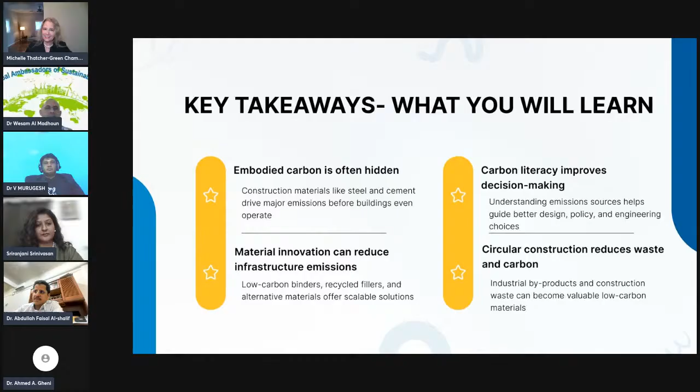We have carbon literacy and global impact as our topic, and these will be our key takeaways and what you will learn, as well as making sure that you end up with actions.

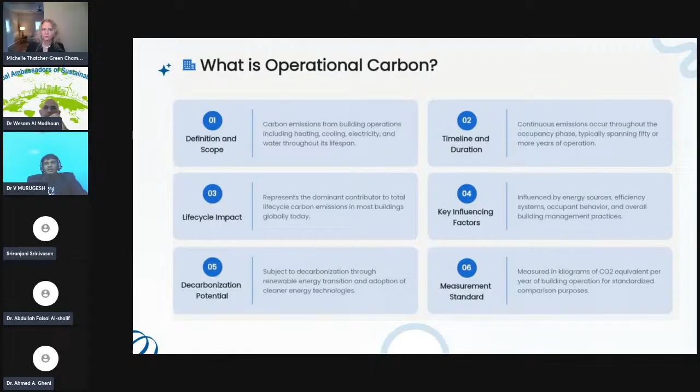So what is renewable energy? Instead of using electricity, we can go for solar panels. Then instead of steel construction, we can go for timber construction. These are some remedial measures we have to switch over to in order to reduce carbon emission. So there is the manufacturing carbon and there is the operational carbon. How is it different?

Embodied carbon is very much less when compared to operational carbon. Embodied carbon is only 20 to 30 percent, but operational carbon covers the lifetime of the building, which is nearly 40 to 50 years. This operational carbon footprint pollutes our environment through carbon emission. So we have to watch these two things very carefully and take necessary action.

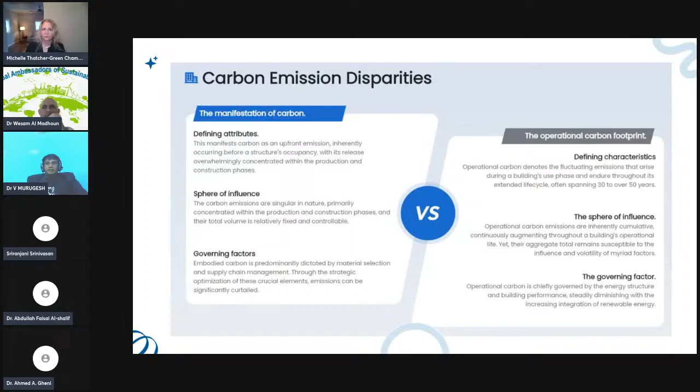Otherwise, carbon emission increases day by day, because we can't control our steel or cement production, which increases day by day. I will show how much it increases day by day and by how many tons. My section two is about the hidden carbon in steel and cement. I already said that it is unveiled, meaning I'm showing it to society for the first time. So how do steel and cement produce a large carbon footprint

in construction projects? First is the extraction of steel, which we get from iron ores, then calcination, then manufacturing, then transferring from one place to another, that is transportation. These things start from embodied carbon and end in operational carbon, that is the building we construct with steel and cement. This is the heavy cost of steel production and how carbon dioxide is emitted. See, day by day it is always increasing.

For embodied carbon in manufacturing steel, mining is 10%, smelting 70%, transport 15%, and others 5%. It emits 2.6 billion tons of CO2 annually. Both embodied and operational carbon combined create nearly 14 to 20% as per a US standard report. Normally it produces 20% of the greenhouse gas effect.

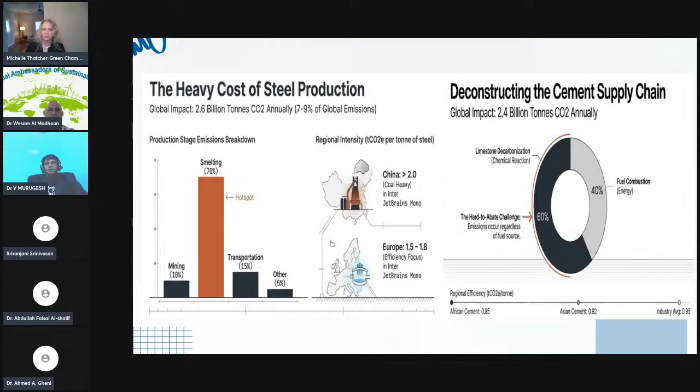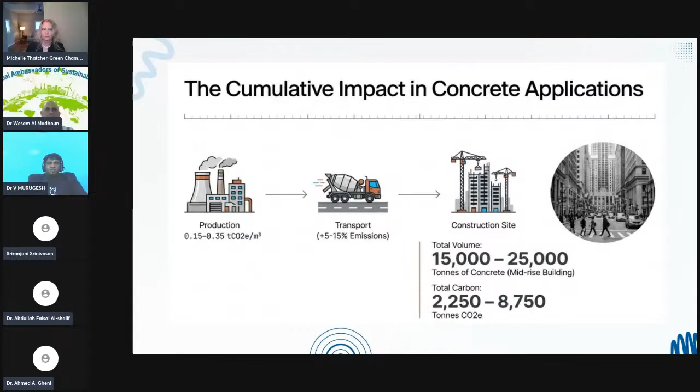To make it zero carbon, we have to use alternative materials. But traditionally, people are a little confused about whether to replace steel or cement, whether it will give high strength and durability or whether it will fail in strength or durability. People have no idea about using sustainable materials because they fear for strength and durability, which are the most important properties of concrete.

So here we are using hempcrete. It is a bio-based invention from a waste material, hemp fiber, mixed with a lime binder. Lime binder means calcium, because we know that cement is very rich in calcium oxide. Its chemical composition is 60 to 70% calcium oxide. So the main ingredient for the calcium is lime.

Okay, so lime binder plus water. While we are mixing, we are making it as an alternative material for carbon. So due to this, the carbon sequestration will make us carbon negative, because hemp fiber has a capability to break the carbon and it will absorb the carbon from the atmosphere. So while absorbing the carbon, automatically it will break the carbon into pieces and make it net zero. So this bio-based innovation plays a vital role in the forthcoming case.

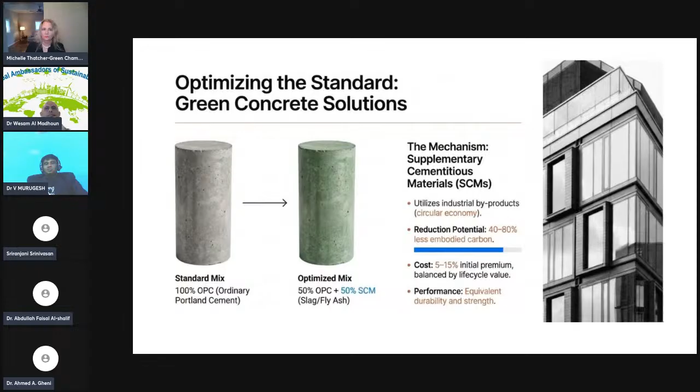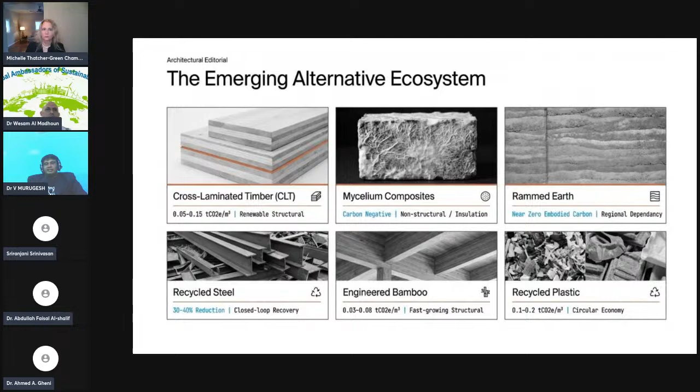Then we can use engineered bamboo, then recycled plastic. So these are the sustainable materials they are using at present to reduce the carbon percentage. So how will it be transferred? When I say, sir, I am going to use sustainable materials instead of steel and cement, then no one came to me. How is it possible? Some of them fear the building should have very good high strength, durability, or it may undergo failure in an earthquake. So I have to translate my strategy and implement this to the society.

How will I implement it? First of all, I have to audit. I have to say, see, this product should not affect the environment. Okay, some of them also agreed. Okay, you can go and audit. Then some of the persons have to analyze whether it has very good high strength, whether it is net zero carbon, and whether it has durability. So I have to prove that.

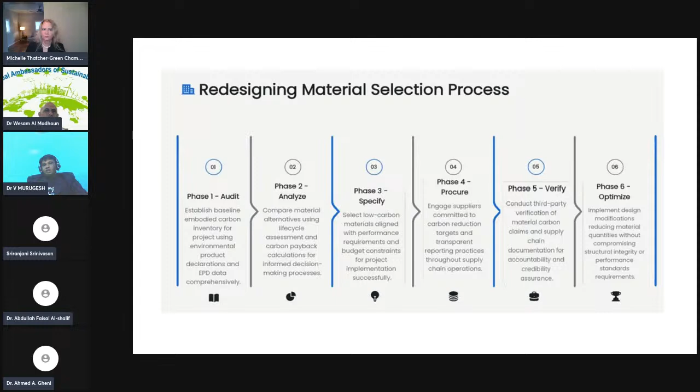So after this analysis, I go for the specification. I have to say that the percentage of carbon materials we are using here is a little bit decreased compared to the conventional one. That is, 5 to 15 percentage of amount will be reduced. So I have to specify. Then I have to procure from some suppliers, because these sustainable materials come from suppliers. Then the suppliers should verify, okay, this product is very good. So with this third party verification, I have to implement it to the concerned society.

So after this, I have to state the policy. See here, one cement bag price is nearly 500 rupees per bag, but my product is almost 300 rupees, and also it will be net zero, so there should be no carbon emission. I have to prove that. I have to give the price mechanism to the concerned market.

Then I have to go for the building code requirements, because when we are using this carbon steel, we go for IS code 456 for designing in India. So for the sustainable materials, we have to produce some guidelines on how to use them instead of steel and cement. Then I go for supply chain transparency. While testing, if anyone comes to see the strength, I have to show that. My product gives 5% more strength than the traditional one. So that chain transparency should be there for the implementation of any sustainable products, because we are going for alternative materials.

Okay, then certificate integration. So for any sustainable materials, we have to go for LEED, BREEAM, and WELL certification, because when we give a certification of LEED, automatically all the consumers will believe our product is the best one, because it is a certified one for the sustainable materials. Then financing incentives. I already said it's a financing incentive when you are going for steel or cement. If the rate is 500, here our product is 300, means automatically if we have very good strength and we have the certificate, all the people will come and approach us.

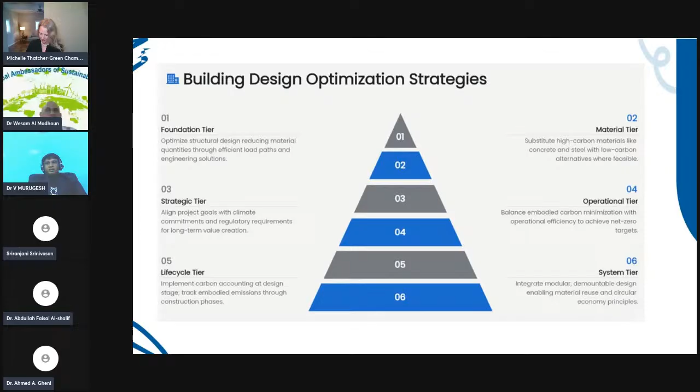Without corporate commitment, we can't be able to do this. So this is the building design. That is the foundation tier. Foundation tier is nothing but we have to reduce the load. Then we have to use the sustainable materials. Then, after using the sustainable materials, we have to reduce the carbon content. So this is the final one.

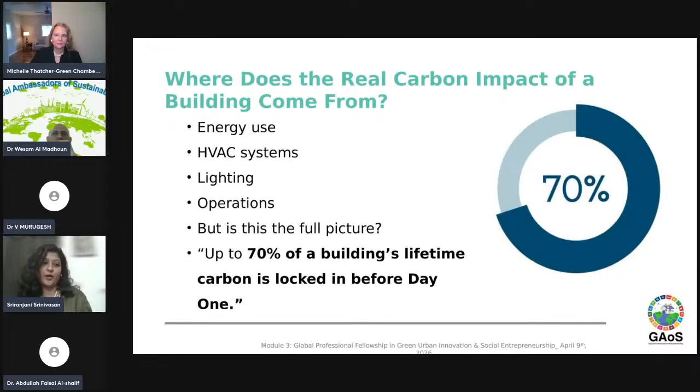So, how does this matter to any of us, right? This is not just a theoretical discussion. This has very real implications for anyone involved in a project. If you are a developer, this is something that could directly affect your ESG positioning, investor expectations, as well as your access to green financing.

And on the other end, if you are a consultant or a designer, then carbon is no longer an abstract concept. It becomes a design parameter, just like cost or performance itself. And if you're a contractor who's into procurement, then your material substitutions and decisions will suddenly carry a lot of carbon implications when we start talking about embodied emissions.

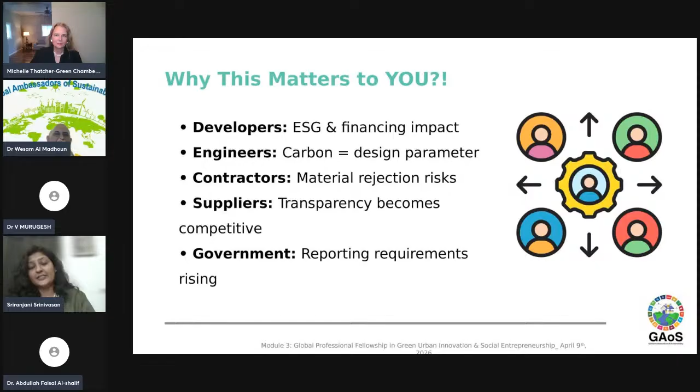At the other end of the spectrum, if you are a manufacturer, then your transparency with respect to product data becomes a major competitive advantage. So embodied emissions associated with materials are no longer a niche topic today. It's becoming mainstream.

Now, like I said, this has become even more critical today when we look at the scale of construction that's happening globally. We are building faster than ever before, and urbanization is accelerating. Infrastructure demand is growing, and with that, the demand for materials like cement, steel, aluminum, and glass is also increasing significantly.

Now, here's the challenge. Most of the emissions associated with these materials are not clearly visible to us. They are not something you can see on site; rather, they are embedded in the product itself long before it reaches the project gate. As you would have understood from the previous presentation by Dr. Murugesh, it's called embodied carbon because it's embedded into the entire process of the product, of the material itself.

So naturally, the next question is, where does this carbon come from? It comes from multiple stages. It starts with raw material extraction, as you saw in the previous presentation: mining, processing, and so on. Then comes the manufacturing process itself, which is often very energy intensive and sometimes involves chemical reactions that release emissions. And then there's transportation, the moving of materials across regions and countries.

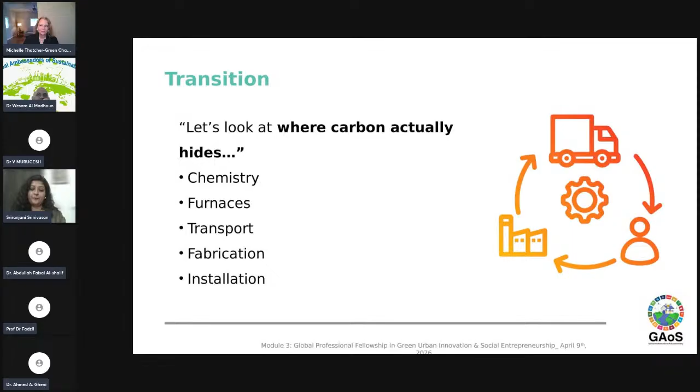Now, here's what makes this problem particularly challenging. From a traditional engineering perspective, we predominantly evaluate materials based on strength, durability, cost, and availability. But carbon does not always align with these parameters. Take two materials. They could look exactly the same, perform the same, even cost the same, but their carbon footprint can be completely different. And unless we specifically measure it, we would never know the difference.

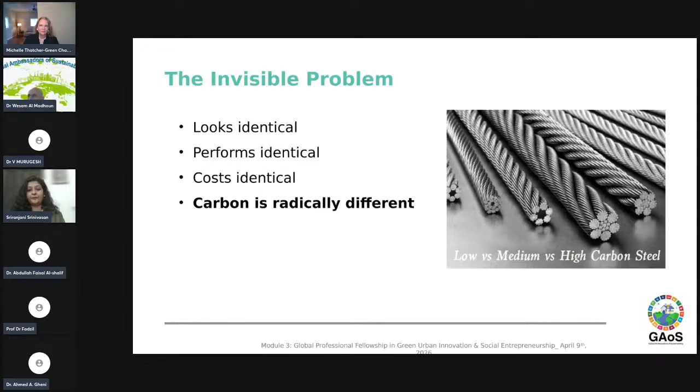Let me explain this with a real example. In one project, a particular type of steel was selected. From a technical standpoint, everything was perfectly fine. It met all structural requirements, complied with the specifications, and there were no issues in terms of performance. But when we evaluated it from a carbon perspective, it did not meet the project's carbon targets. And why was this? Purely because of the manufacturing process itself.

The steel was produced using a blast furnace, which, as most of you might know, is highly carbon intensive, and it relied a lot on iron ore and coal. If the same steel had been sourced from an electric arc furnace, primarily using recycled steel and electricity, the emissions would have been significantly lower. So technically, both options were acceptable, but environmentally, they were very different. And that is exactly where the decision-making gap exists today when we talk about embodied emissions.

Now, if we break this down into life cycle stages, most of this embodied carbon falls under what we call the A1 to A5 stages. A1 being the raw material supply, and then there's transportation, manufacturing, and A5 is related to the transportation to the site and the construction itself.

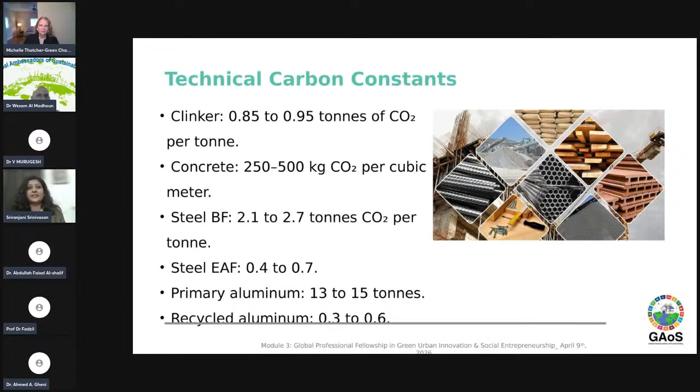So the important takeaway here is that we don't need to optimize everything at once. A large portion, almost 80 to 90% of embodied carbon in buildings comes from a few key materials, primarily your concrete, steel, aluminum, glass, and various facade systems as well. So if we focus our efforts on these materials, we can achieve substantial reductions.

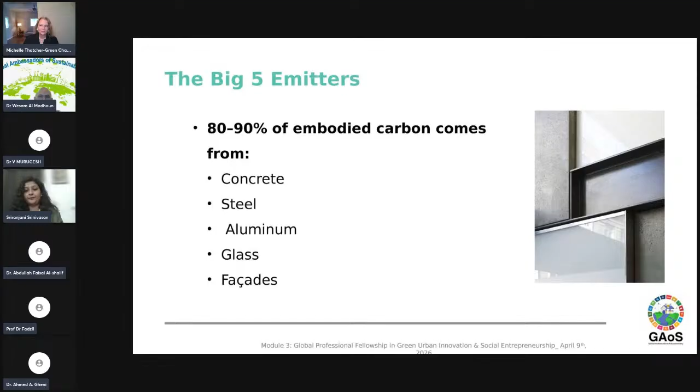When we talk about embodied carbon, cement is one of the biggest contributors, like we've discussed in the previous presentation. And it's important to understand why. It's not just because of the energy use. In fact, a large portion of emissions from cement actually comes from the chemical processes itself during the clinker production.

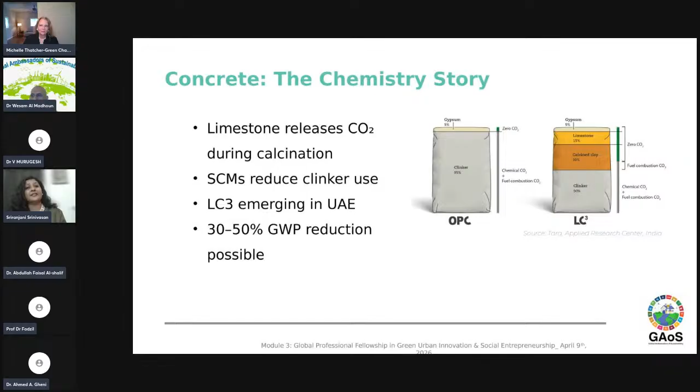I'm not going to be getting into much detail about it because I think a large part of it was already dealt with in the previous presentation. But it's important to understand the various aspects associated with the entire chemical process in the manufacturing of these products for us to understand the entire picture around the embodied emissions of these various materials.

Similarly, we've got, with respect to steel, now this again is another very carbon intensive product. So from a design perspective, it meets strength requirements, structural performances, and all of that.

But from a carbon perspective, there are two very different pathways, right? One is a blast furnace route that could be taken, highly carbon intensive, and the other is where you use an electric arc furnace and things like that. So decisions in the entire process of manufacturing of these materials will have an impact on their carbon footprint.

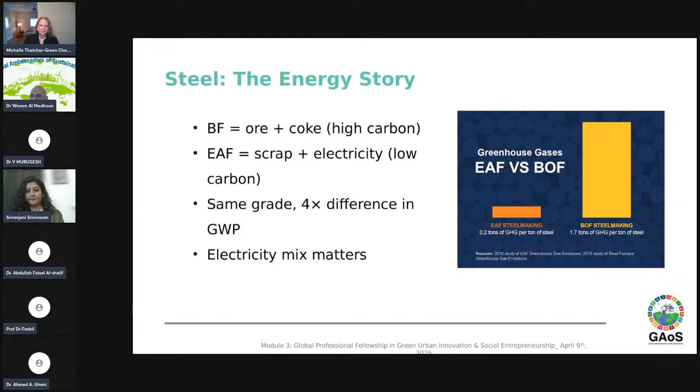Aluminum is an interesting material here because it has one of the highest embodied carbon values among the common building materials, but also it's one of the highest potential. It has the highest potential for reduction itself, right? So this is again something that could be looked at in terms of materials for your buildings.

So at this point, it's important to simplify the approach, because when we talk about embodied carbon, it can feel very overwhelming. There are so many building materials involved. But the reality is that we don't need to be optimizing everything. A small group of materials that contribute to the majority of the emissions is what we will have to be addressing and make the right decisions moving forward.

So now that we've understood where the emissions are coming from, the next step is about measurement, because without measurement, we are only making assumptions, and embodied carbon needs to be quantified. And today we have the tools that help us do that. We use life cycle assessment methodologies to calculate emissions across stages.

And increasingly, this is becoming integrated into the project workflows. So instead of guessing which option is better, we can actually compare material databases and shift the decision making from just opinions to actual evidence-backed decisions.

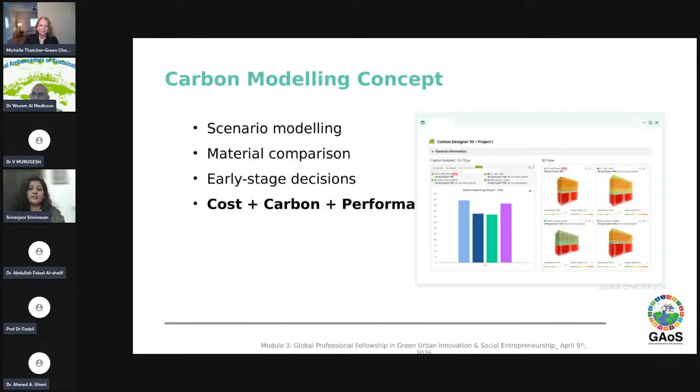This gets really powerful. You'll be able to model scenarios based on the materials at a very early stage in the design itself to help you make actual decisions where you can change materials, optimize quantities, and explore alternate materials as well. Based on that carbon modeling, you'll be able to make actual decisions.

So now that the design intent is already put into place, what's designed has to be translated into something that gets procured and ultimately constructed as well. That's going to be very critical. So how do we do that? We move from understanding the problem at the stage of design into the implementation. Let's look at how we do that in practice.

For example, let's start with concrete here. Instead of just specifying the strength, we could be going ahead and saying concrete should be emitting less than 300 kgs CO2 per cubic meter. At this point, the question would then be, should this be M30 or M40 concrete? But it's also important for us to understand what would be the carbon impact of that mix accordingly.

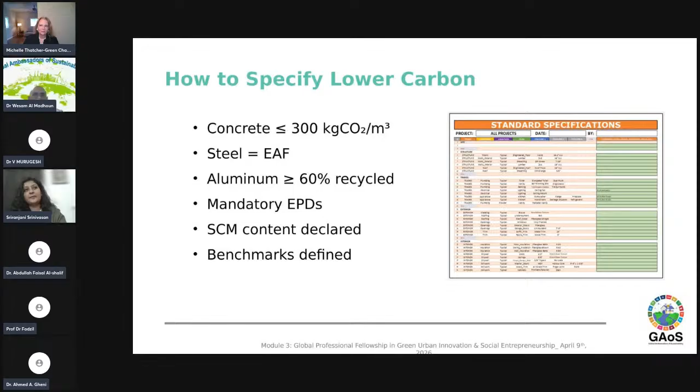Based on similar questions, it's important to float your tender documents, where you have EPD backed BOQs that play a very key role in the actual decision making process. You should be able to make decisions based on transportation distances, based on which you will also be able to understand the entire embodied emissions of the particular product.

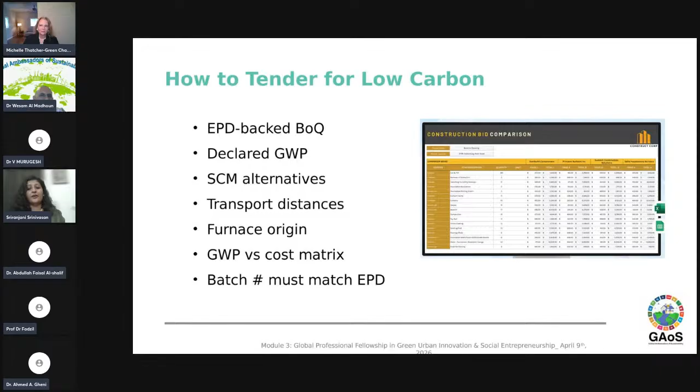So once you've specified and tendered for low carbon materials, all of this gets locked into your contracts and helps make the right decisions in terms of your supply chain and vendors from whom you're going to be able to purchase effective and efficient materials for your construction.

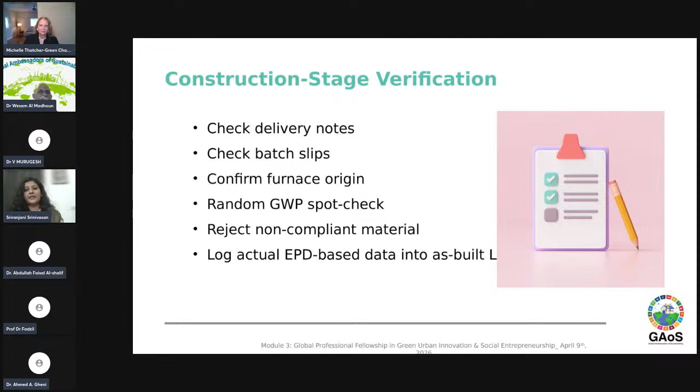So various things that you can check at the construction stage as well. Once you've floated your tender documents and purchased the associated materials, you have random global warming potential spot checks that can be done, and you can log the actual EPD-based data of the products being delivered to the site. All of this will play a very key role in the verification process during the construction phase.

Stepping back a little from the project level, this is what it looks like on a global perspective. The world is changing today. Across nations, we have various aspects of carbon coming into the picture, especially with respect to embodied emissions. So some real example numbers showcase how the world is seeing a reduction from the lens of carbon.

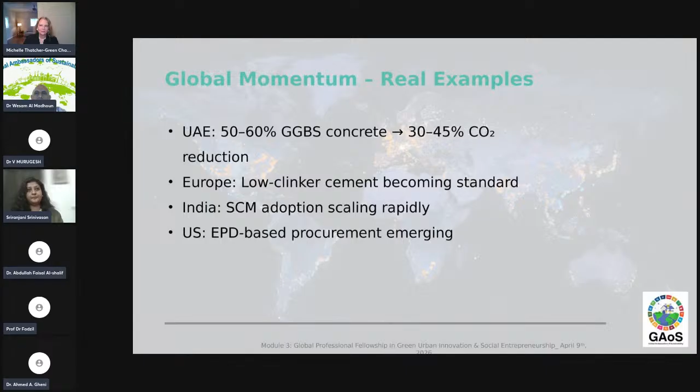That's where it's going to be very critical, and I'm just bringing in what we do at my organization. Right from design into construction into operations, you would be required to quantify all of the emissions associated with each material, each process. Based on that, there's a verification or validation that happens with certification bodies like Global Network for Zero, which is what we do. Based on this entire structured approach around your project, you'll be able to make the right decisions associated with embodied emissions.

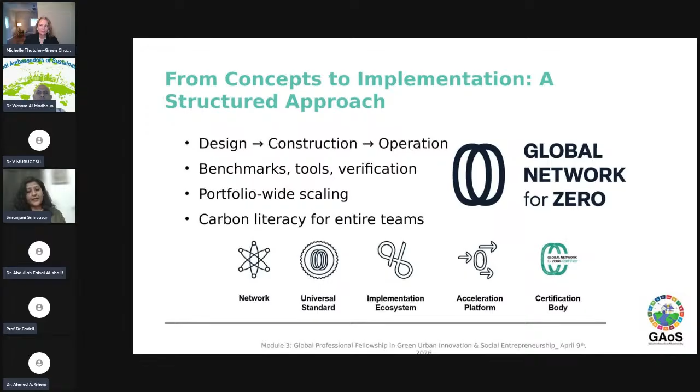So after everything I've said today, I want to leave you with one simple idea. Ask for the EPD before you ask for the price of the product, because the moment you do that, you can change the entire conversation. Today, most decisions are driven by cost first, and carbon becomes an afterthought. But when you ask for the EPD first, what you are basically saying is performance matters, impact matters, and transparency matters as well.

I'll leave you with that thought. And remember, every material that we choose builds the world our children are going to be living in. Thank you so much for the time today. I would be happy to take any questions at the end of the session.

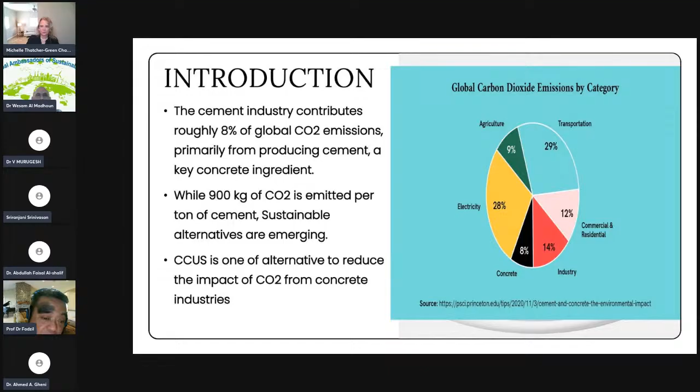Due to this issue, world organizations have come up with an idea to introduce a carbon CO2 tax. When they introduced the CO2 tax, all the industries producing CO2 got worried because they have to pay for the CO2 they produced. Due to that, as an initiative to reduce the impact of carbon tax on industries, they came out with another idea. They call it CCUS.

So what is CCUS all about? CCUS refers to what we call carbon capture, utilization and storage. The main reason for having CCUS instead of paying a high CO2 tax is that it also works toward SDG requirements, and nowadays people are talking about ESG. So CCUS becomes a greater point for the industry to get the ESG point and represent the initiative of SDG.

So C refers to capturing CO2 from industrial sources. U refers to utilization of CO2 in concrete production or curing. And S is the storing of CO2 permanently in the concrete matrix.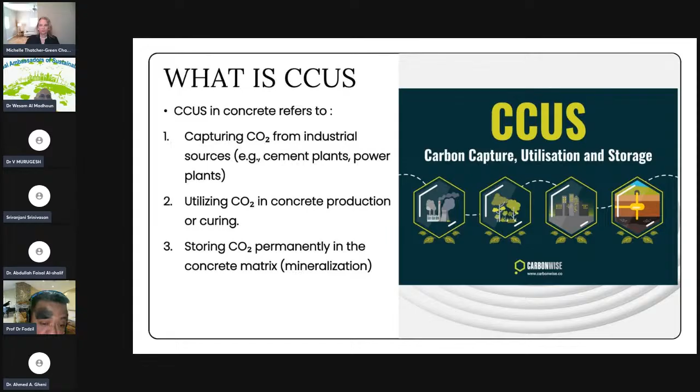Unfortunately, the calcium hydroxide stops the intersections of calcium silicate hydrate and creates micropores inside the concrete or cement matrix. This issue has become a big worry for engineers and scientists, who are looking forward to reducing the composition of calcium hydroxide in the cement matrix.

So the concept of introducing CO2 into the concrete is identified as one of the best methods to overcome the issue of calcium hydroxide. From the research carried out, it is identified that by introducing CO2 into the cement matrix, the CO2 has successfully transformed the calcium hydroxide into calcium carbonate.

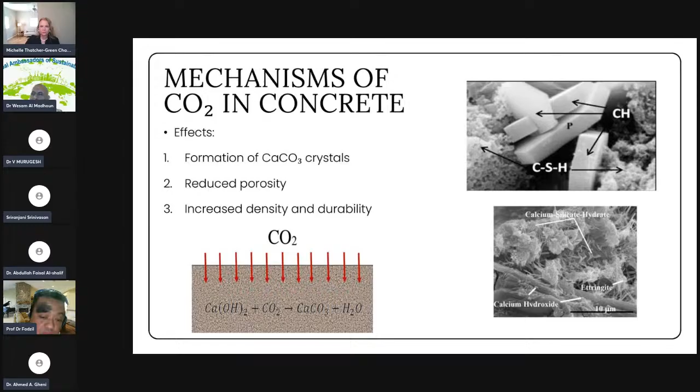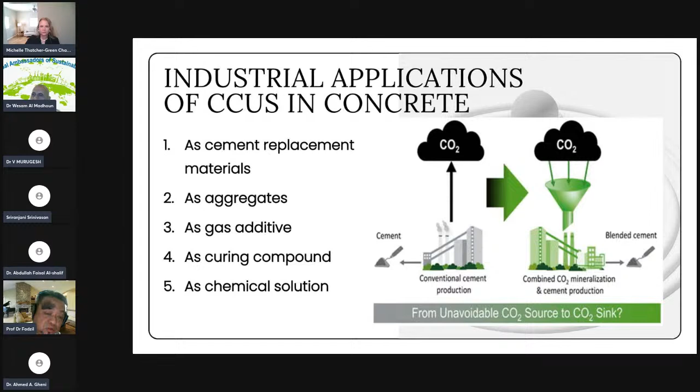This slide shows how we are producing CO2, and how we are producing aggregates from the CO2. Nowadays, people in the construction industry are talking about RCA, recycled concrete aggregate. Actually, this is one method to reduce the impact. Instead of using natural aggregate, we might also use recycled concrete aggregate.

But somehow the recycled concrete aggregate has problems due to unquality aggregates and low strength of aggregates. In order to overcome this issue, research has been carried out by introducing CO2 to the recycled concrete aggregate. We successfully transformed the calcium hydroxide into calcium carbonate in the recycled concrete aggregate and improved the properties of the aggregate, such as strength, porosity, and water absorption level.

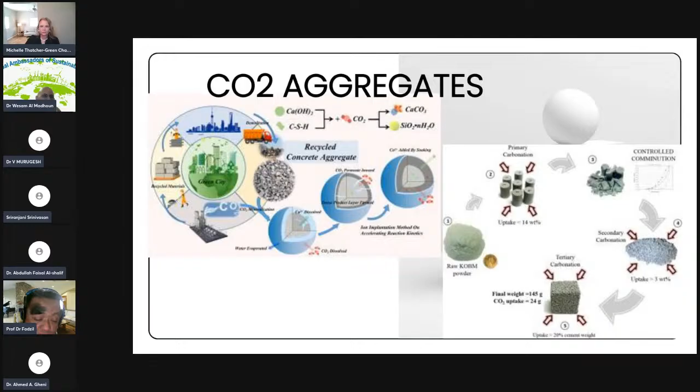Instead of that, we can also use CO2 by injecting the CO2 directly into the fresh concrete. There are a few companies nowadays introducing this technology to the concrete industry. Injecting the CO2 into the concrete has been identified as reducing the cement content.

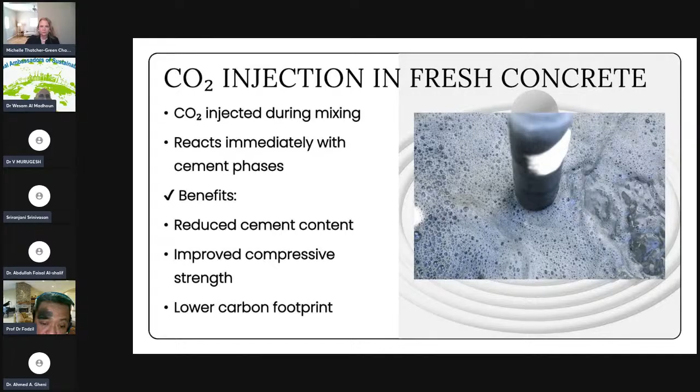As I mentioned before, the chemical reactions transforming the calcium hydroxide into calcium carbonate have increased the strength, and research carried out by reducing the cement content and injecting the CO2 into it successfully produced comparable strength to when 100% cement is used. Besides that, it is also helping the industry lower its carbon footprint.

There are three methods of injecting the CO2 into concrete. We can inject the CO2 by introducing it into a water tank, and then the water in the tank is used as the mixing water in the concrete mix.

Besides that, they might also inject the CO2 into the water while making what we call cement paste slurry, where the cement paste is included in the water tank, and then these two materials are introduced to the aggregates in order to produce the concrete.

We also have the third method, where the CO2 is directly injected into the concrete. So this is how we can utilize CO2 in concrete production. The major issue to be identified is the total time of injecting CO2 into the concrete, because CO2 is an acidic gas and concrete is an alkaline material.

So when we over-inject the CO2, the concrete will transform into an acidic material, and no hydration process will occur. So this is another issue. We have to identify the optimum time and the optimum amount of CO2 to be injected into the concrete.

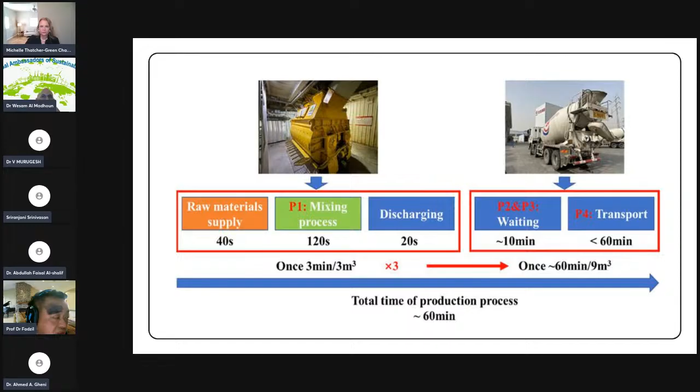This has become a challenge for the concrete industry, and it becomes harder because the quality of CO2 has to be controlled. If you want to use CO2, we have to make sure we are using the same quality of CO2 in order to produce a higher or better concrete strength.

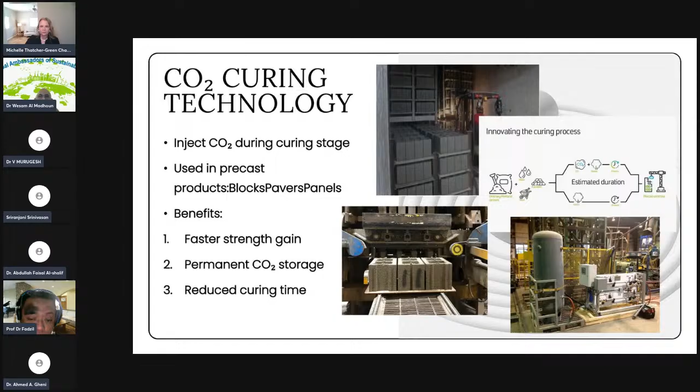Besides that, CO2 can also be used during the curing process of concrete, especially in the precast industry, or the block, pavers and panels industry. Research has identified that curing concrete with CO2 at the right, optimum percentage and time produces better strength compared to normal concrete.

In UiTM, we are producing a chemical called COS, or carbon oxide solution, produced at an optimum mix proportion. This chemical is produced by injecting CO2 into a specific solution, and then we use it as a water replacement in the mix.

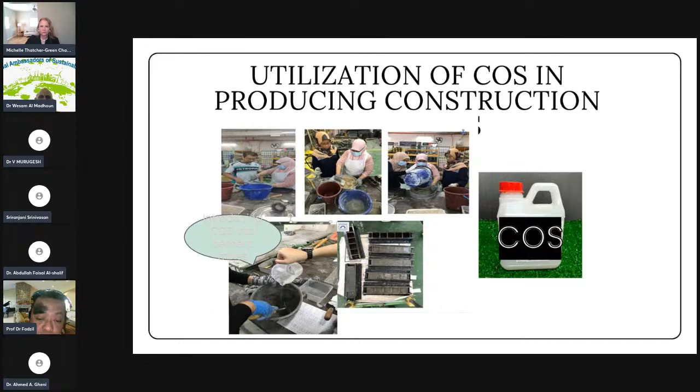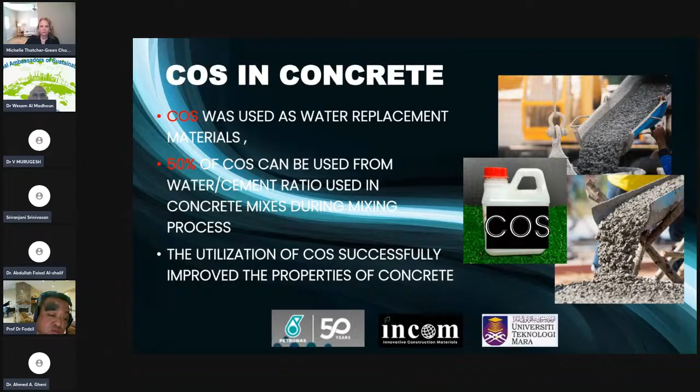In the lab work carried out, we produced three materials: concrete, bricks, and blocks. All the materials were cast into a specific size and then tested, and we identified that using 50% COS produces better concrete strength.

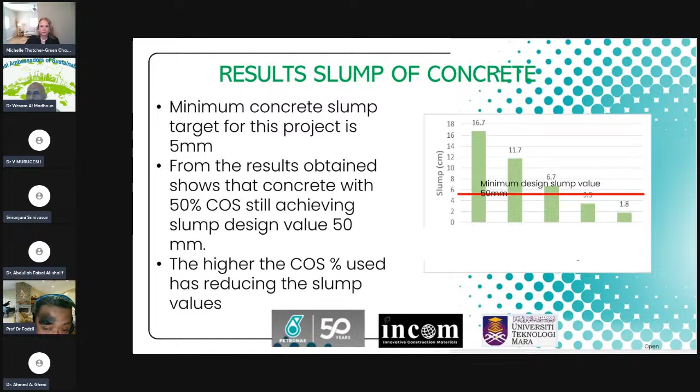This is some of the methodology where we produce the COS and use it as a water replacement in concrete production. The results show that using COS, the carbon dioxide solution, in the concrete reduces its workability. The higher the carbon content in the COS, the lower the workability. So this has to be taken into account during the concrete mix design stage.

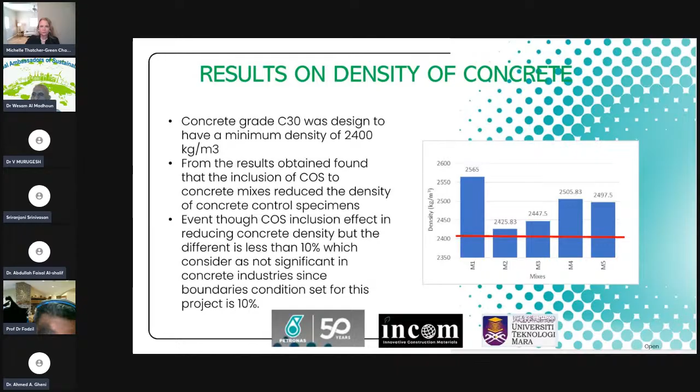But the density of the concrete was not significantly changed by including the CO2 in the concrete. The difference is less than 10%. But this is the most important, or most interesting, point.

From the research carried out, we successfully increased concrete strength by about 35% by introducing the COS into the mix. At almost all percentages, we found that using COS successfully improved the concrete strength, even though we are using the same amount of cement as the control.

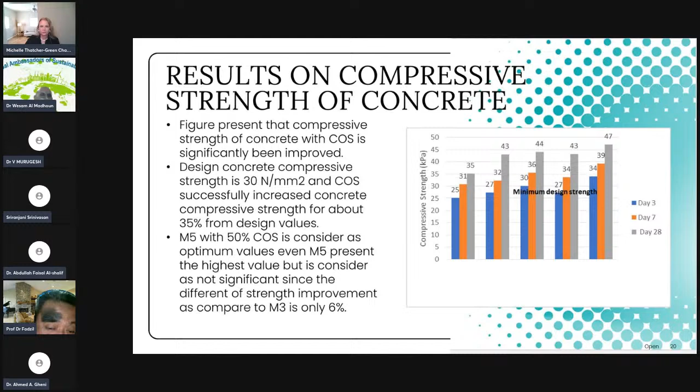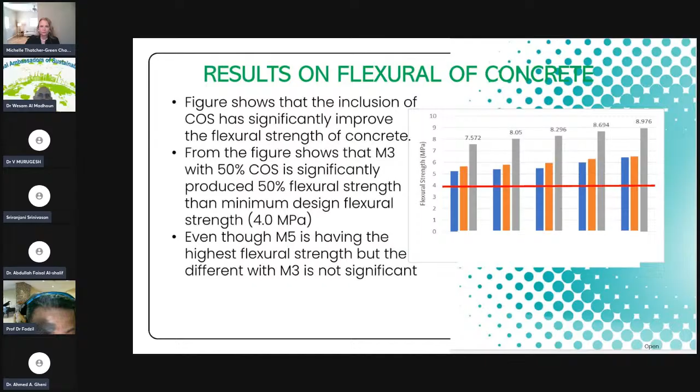as compared to the control specimen. So from all the research being carried out, what I can say is that the benefit of CCUS in concrete is especially on the environment, with up to 15 to 25% CO2 reduction in concrete production. Permanent carbon sequestration also becomes a benefit to the environment, because the CO2 has been successfully cured or stored in the concrete. On the technical part, the utilization of CO2 has increased the strength of concrete, early and long term as well, reduced the permeability and improved the durability of concrete.

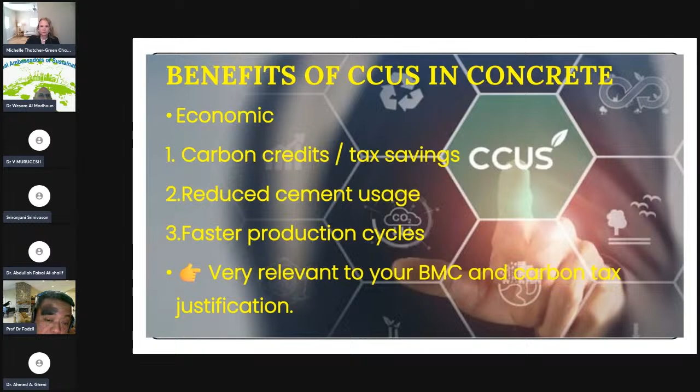Besides that, if you're looking at the economic part, the utilization of CO2 will have an impact in reducing the tax, the carbon tax. It also reduces cement usage and makes the production cycles faster. So this will be a very good point when we're talking about the technicals. And on the economic part, we can see that the CCUS initiative has been so-called successful, improving the concrete properties.

But there are some challenges that we have to face, where the CO2 supply and the infrastructure to produce or to absorb the CO2 have to be seriously taken into account when we are trying to use CO2 inside the concrete industry. The process optimization has to be identified, as mentioned before. The dosage, the pressure, the time, even the temperature also have to be identified and controlled. And then there is a lack of universal codes on standardization. As for now, there is no specific standard to represent the utilization of CO2 in concrete.

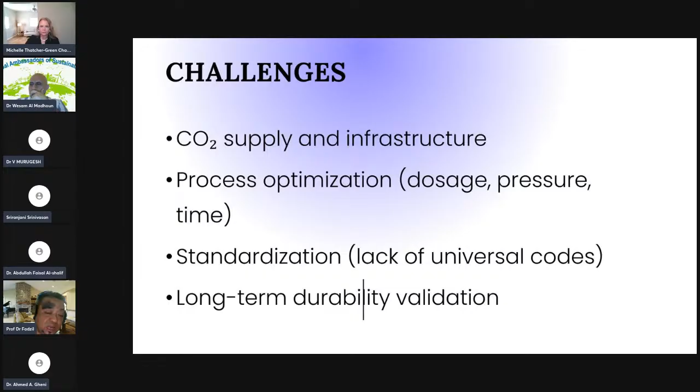In Malaysia, we have the Concrete Society Malaysia. I'm the ex-president of the Concrete Society Malaysia. We try our best to promote this product to the industry, and we also hope that the authority bodies will look at it as a serious matter in order to support the ESG and SDG initiatives. Besides that, long-term durability validations have to be carried out. Frankly speaking, with the research being carried out in my lab, up to now we have successfully produced up to one year of data. But I do believe that this kind of research has to be carried out more and more. We hope that we can get more funding from the industry and from the government as initiative and motivation for us in conducting the research in the future.

So I end my presentation with: embrace change, lead the future. The world is shifting, and those who adapt and innovate will be the ones to lead the way. So with that point, I end my presentation. Thank you very much.

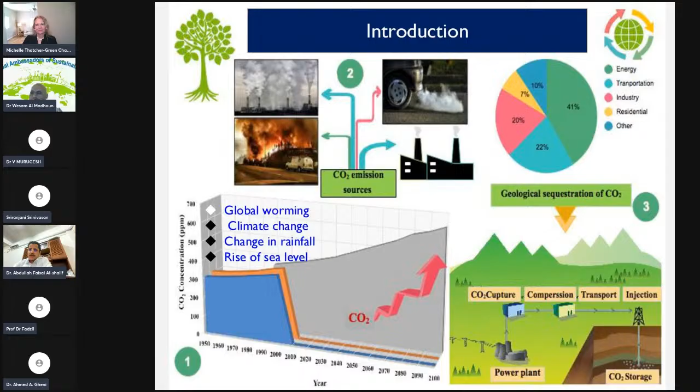Can we move to the second slide? The increase of CO2 concentration in the atmosphere, as you can see from 1950 up to 2000, is almost still accepted. But from 2000 up to 2100, there will be a high or double concentration of CO2. That's why we are trying to find a solution from now, a solution for CO2 sequestration.

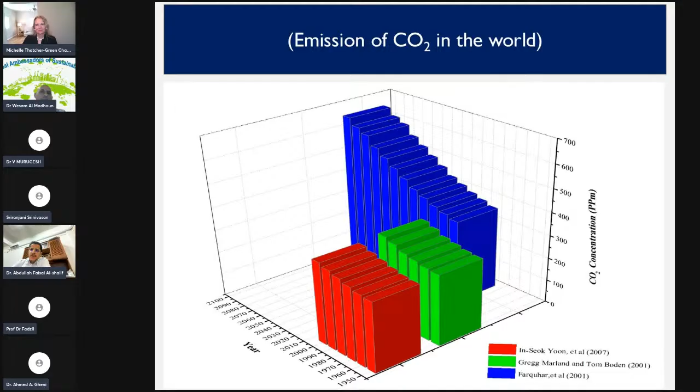Who is responsible? All countries are responsible, but most CO2 emission is from China, the United States, the European Union, India and Russia. Most of the keynote speakers already talked about cement production, because producing 1 ton of cement equals around 900 kilograms, or almost 1 ton, of CO2. Imagine, 1 ton of cement equals 1 ton of CO2.

Why is China the first in CO2 emission? Of course, because there are so many factories, but for your information, China is producing 57% of the cement in the world. So more than half of the cement in the world is produced by China. And India produces around 6.6% of cement. That's why India also contributes around 6% of CO2 emission in the atmosphere.

That's why we have to look at the factories of cement, and other factories also, but cement we will list first among the factories that produce high amounts of CO2. That's why we are trying to use alternative methods to replace cement, or sometimes to reduce the cement. In some concrete now we are trying to avoid cement, but we cannot avoid cement totally, 100%.

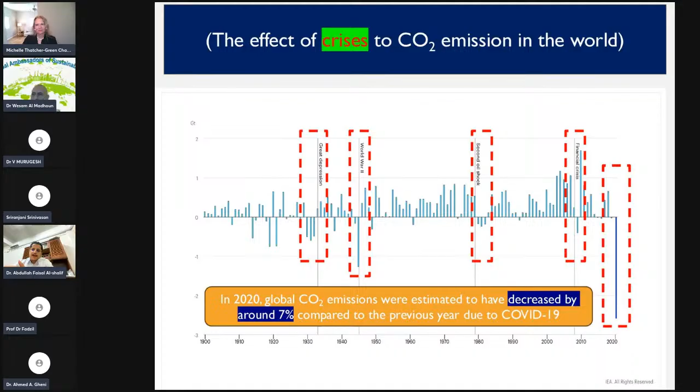That means the increase of CO2 in the atmosphere is related to human activities. When human activities are normal, of course CO2 will increase. So we are trying to find a solution that can decrease CO2 and keep life normal for humanity. Okay, can we go to the next slide? This one I already talked about, the sources of CO2 emission.

Okay, now as Dr. Fadzil talked, we are trying to use CO2 inside the concrete, but I will talk from a different angle. He is trying to inject CO2 into the concrete. Actually, CO2 can be absorbed by concrete; according to the natural carbonation process, CO2 is sequestrated inside the concrete, but it takes a very long time for the carbonation process to occur.

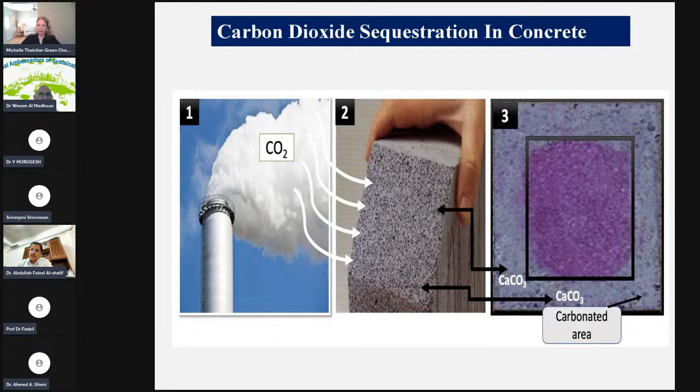After we sequestrate CO2 inside the concrete, by chemical reaction it will produce calcium carbonate. This process happens naturally, but very, very slowly. What we did in our research, we tried to use bacteria inside the concrete. This bacteria, can we move to the...

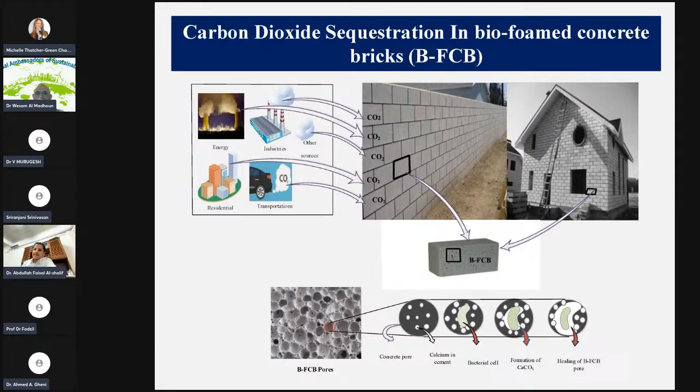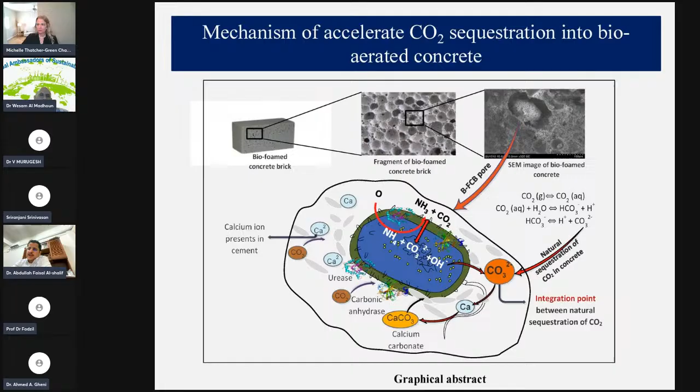Actually, bicarbonate can occur from natural carbonation, but when bicarbonate meets the urease enzyme and carbonic anhydrase enzyme together, it will react with calcium and produce calcium carbonate. This process will self-heal the concrete pores. It also absorbs CO2 from the atmosphere to produce calcium carbonate, which makes the concrete stronger and reduces the permeability of the concrete.

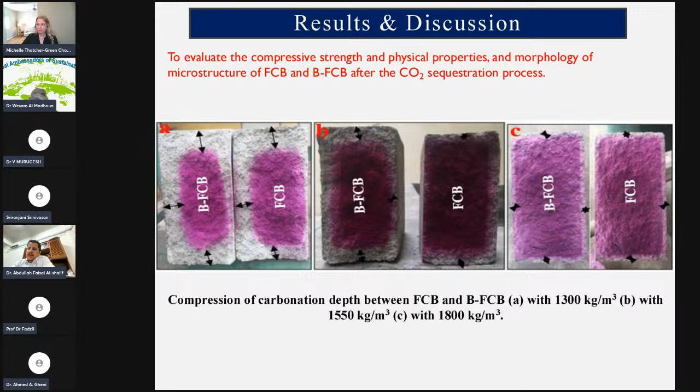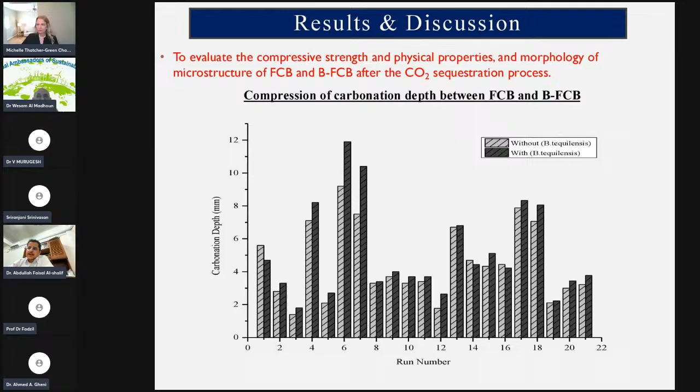Also, for the carbonation depth, the results show that with bacteria it is higher compared to without bacteria. Some people will say if we use bacteria, the carbonation will go further inside the concrete, which will affect the steel. Of course, it will affect the steel of the concrete, but we are trying to use it for non-reinforced concrete.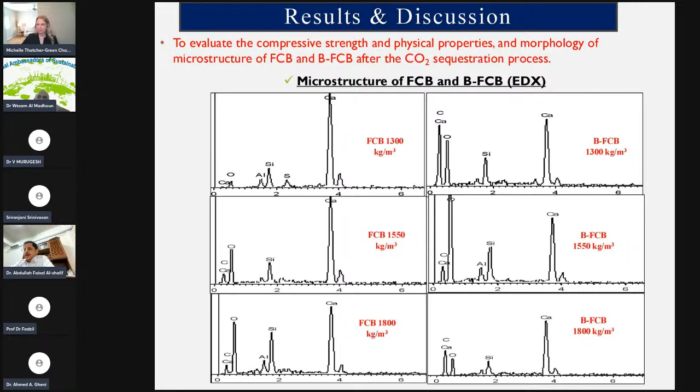Why? Because it has already used some of the calcium in the concrete to produce calcium carbonate, which plays the main role in the self-healing of the porosity.

That means, yes, the CO2 is emitted from the cement factory, but in this research we are trying to absorb the CO2 that was emitted from the cement factory back into the cement, into the concrete. What's already emitted from the cement, we are trying to retain it back in the cement again.

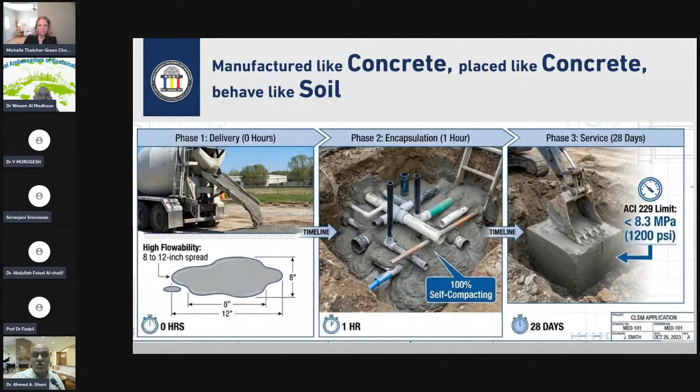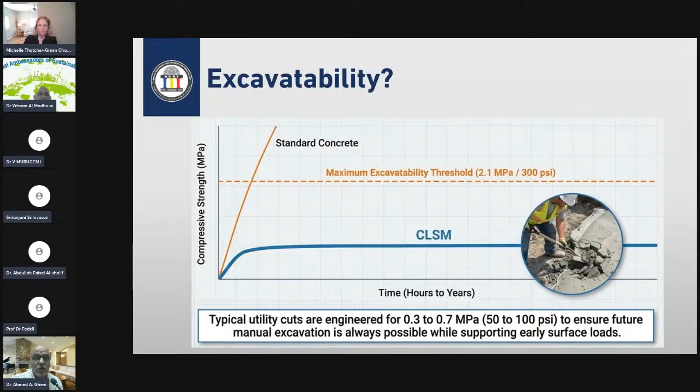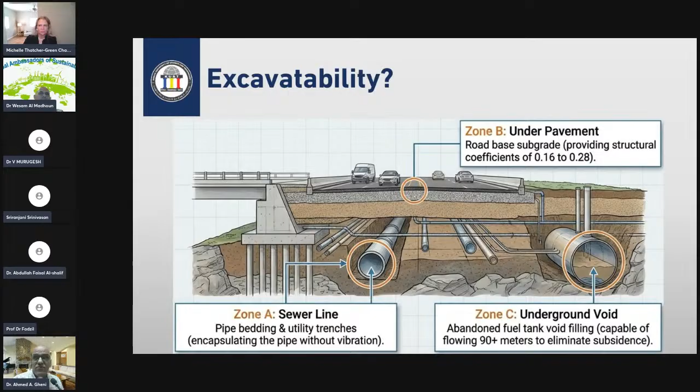When I'm talking natural, in some cases, due to the topography of the land, some areas need to be leveled. When we add layers of soil, we have to do the compaction layer after layer, while adding this will just set and give you the strength that you want. Or it is sometimes abandoned fuel tanks, void filling - whatever you have in a building, you can fill it with those materials.

Now, what is our alternative, our proposal for today? The traditional CLSM used Portland cement and mined river sand in order to produce a low strength cement concrete to do this job. Our alternative today will focus on both the binder and the filler coming from recycled or abandoned material that can provide the same goal or purpose.

So for the binder, we will introduce something similar to geopolymer, but we will use a material that has never been used before for geopolymer because it cannot be worked for real concrete - I will touch base on that shortly. At the same time, rejected or off-spec cement is rejected due to many reasons, which I will explain in the next slide.

As a binder, in terms of the industry, for the filler we will use tailing - any leftover from mining - and industrial waste as well, to come up with the green, controlled, low strength material.

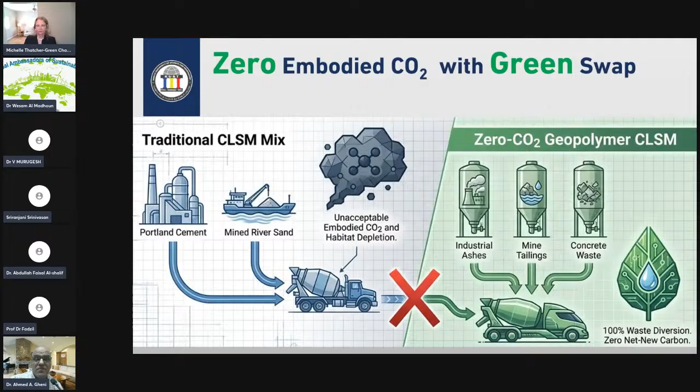Our replacement: the traditional Portland cement will be replaced by off-spec fly ash and off-spec cement. The virgin aggregate will be replaced with mine tailing - those huge volumes of soil or related material around mining, for example for gold, silver, or copper. When they extract those, you get mountains of leftover. We will use that as well.

So whatever we have as Portland cement, pure virgin mined sand and aggregate will be replaced with waste fillers and waste binder to get a zero embodied CO2 controlled low strength material. When I say zero, it's because literally we will spend nothing in manufacturing them - we will put zero CO2 during their manufacturing.

Now, when I'm talking about binder, how is that different from geopolymer? Before, when we used geopolymer or alkali activated material, we used pure and standard fly ash, silica fume, or other things. But no matter where you go, there is some stuff that cannot be used for concrete. One of them is bottom ash - the part of the coal that was not even burned, so it's not transformed to fly ash.

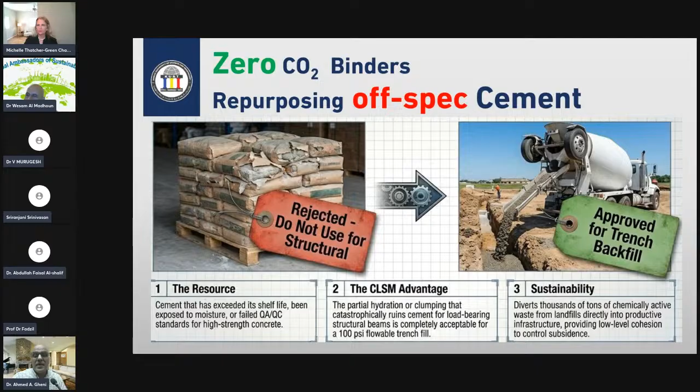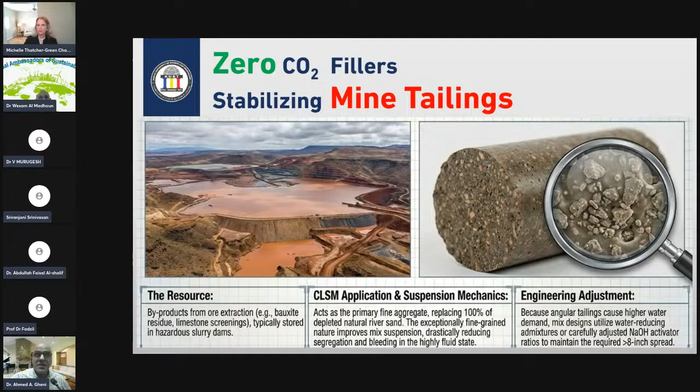In terms of the mine tailing, as I said, as much as they are spread around the mines, now we have an opportunity to solidify them in order to remove any possibility of creating unwanted dust or material that can go into the air.

In terms of the circular economy, the beauty about this material is that it can be manufactured inside the site. Whenever we are demolishing or extracting, right away we are crushing those and directly using them in the mixer with a certain binder, to use them again as a filler that can harden very fast.

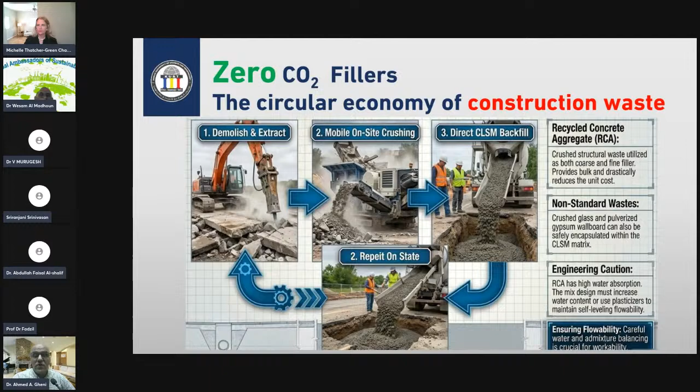This circulation of taking unwanted demolished waste can directly transform into something useful. Even for big cities producing solid waste from concrete, brick, and other products, it can be processed right away and put into an application requiring low strength material. This cuts the intensive use of material that my colleague mentioned, where cement is responsible for almost 1 ton of CO2 emission per ton produced. So we don't have to bring in new material—we use the solid waste we already have to recycle again.

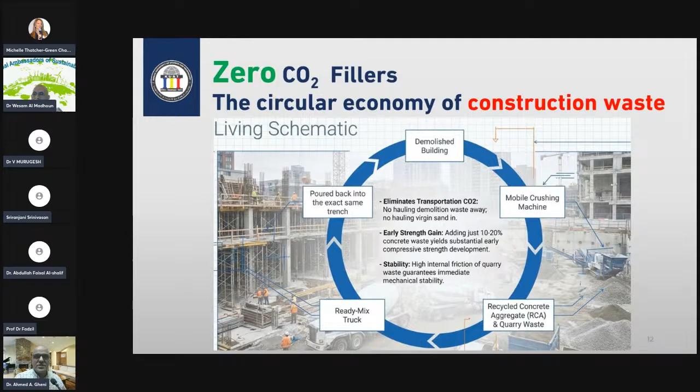Another opportunity is the encapsulation of industrial waste. We have some industrial waste we wish to encapsulate in order to prevent any leakage from it and find a new purpose for it, creating a win-win situation. Crushed glass or other types of sand that are wasted due to certain manufacturing processes can be put together for a different purpose—using them for a useful purpose in construction, while at the same time moving them away from places where we don't want them.

Now, is all of what I said just an idea? The answer is no—it has been examined. I was part of a research group that developed controlled low strength material, where we used mine tailings, bottom ash, and waste. These literally passed every checkpoint required by the ACI, American Concrete Institute 229, limits related to flowability, water demand, early strength, and ultimate strength. We got very good results that qualify our proposed material for use in construction.

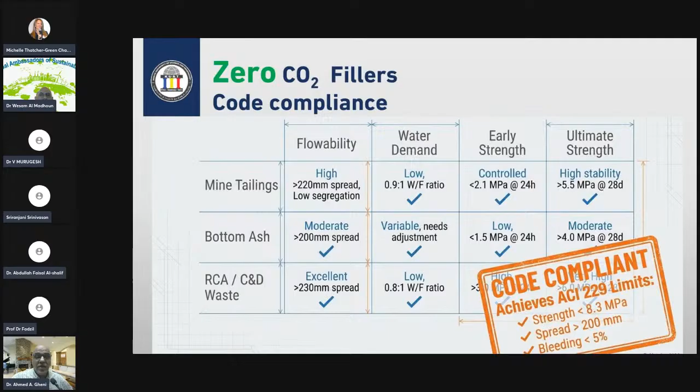Does what I'm saying come without challenges? Can we use it right away? The answer is no. Depending on the location, the waste being used, and the chemical composition of the material, we still have three challenges. Number one, the water demand: some materials are very porous, so they require a lot more water compared to soil. We have to research this and introduce, for example, air-entraining admixtures that give flowability without extra water.

The other challenge is gas expansion. Due to the chemistry or chemical composition of these materials, we may have gas escaping a certain area. So we have to investigate our material and develop research that can capture even the gas from those materials.

And finally, the leaching. When I talk about leaching, I mean: will these materials, used underground during rain or water exposure, leach into the groundwater? The answer is yes and no. If you do it the right way, with the right mix, your leaching will be zero. But if you do it randomly, you may end up polluting the groundwater with those chemicals. This requires, for example, trial mixes and strict pH monitoring to ensure the geopolymer matrix fully encapsulates any toxin—are we fully encapsulating this or not—and most importantly, it requires more research in this area.

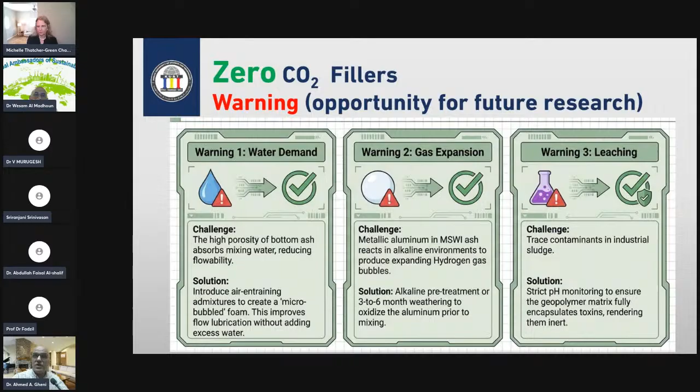Again, it depends on the location of the material—it may work in the United States, India, the Middle East, and vice versa.

Now, what we can get with this is a very beautiful, bright, sustainable future—Ahmed, we have two minutes.

Yes sir, two minutes. Yes, I'm about to finish.

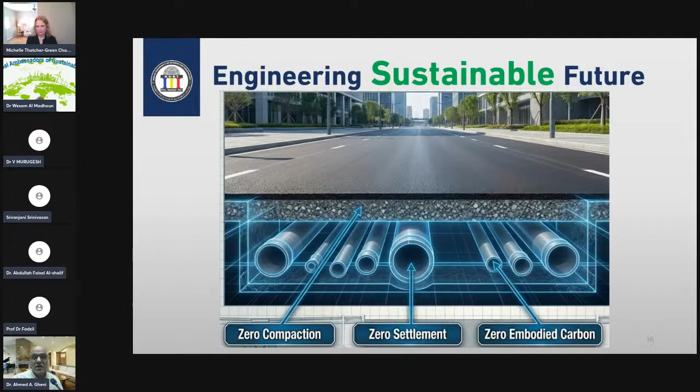Yes, we have a sustainable future where we can have a material that requires no compaction, no workers, no settlement, yet is strong enough to carry everything, with zero embodied carbon in it. I will end what I'm saying here. For years and years, concrete was the backbone of civilization—concrete built civilizations. But now it must help save those civilizations, because it comes with a lot of CO2, a lot of carbon emissions. So it's time for concrete to be part of our green, sustainable solutions. Thank you.

Thank you so much, Dr. Ahmed. Again, another interesting presentation and findings.